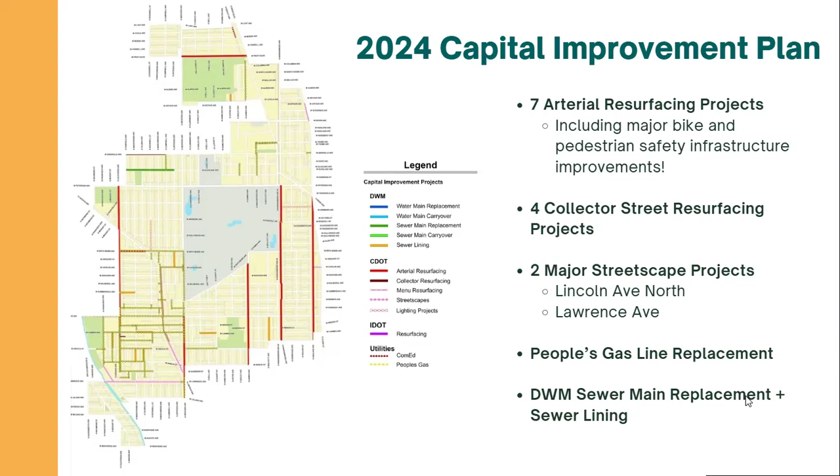We have this stuff on our website, you'll be able to check out details later. But if you could imagine, everything there that's a color represents a piece and part of the ward and the street that's being affected by one or more of those things. It's a lot, always. But what we're going to do is really break down streets right now, and we're going to have Murph take it from here.

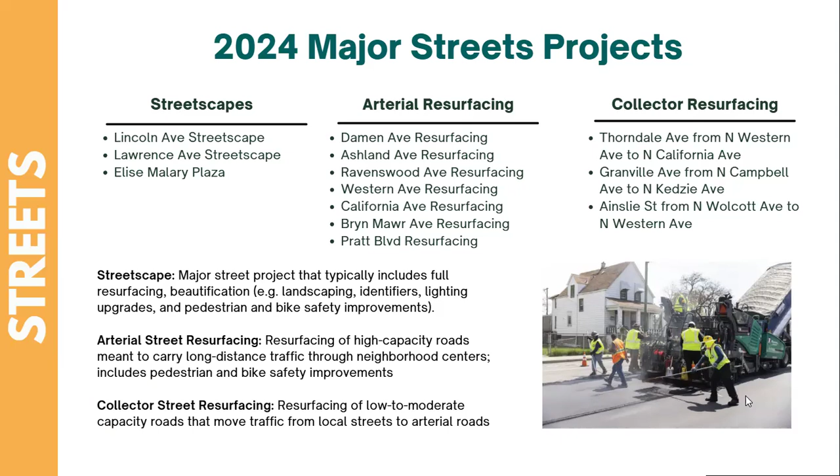And then one step down from that, we have collector street resurfacing, which are those lower volume roads, like Granville is a good example of one of those. Those typically are just resurfacing, but for a lot of our collector roads, we're also looking at pedestrian and bike safety infrastructure for those as well. So we are going to go through some of the major AR projects that are coming up this year.

You can see on this map here, anything in red is an arterial resurfacing project. A lot of parallel arterials happening. So one of the things we're trying to do as a ward is work with CDOT and make sure these are being scheduled so they're not having a really negative effect on the community. Construction is going to construction, it's going to be a pain, but we want to do things like make sure when we're doing Damen, we're not overlapping with schools letting out, things like that.

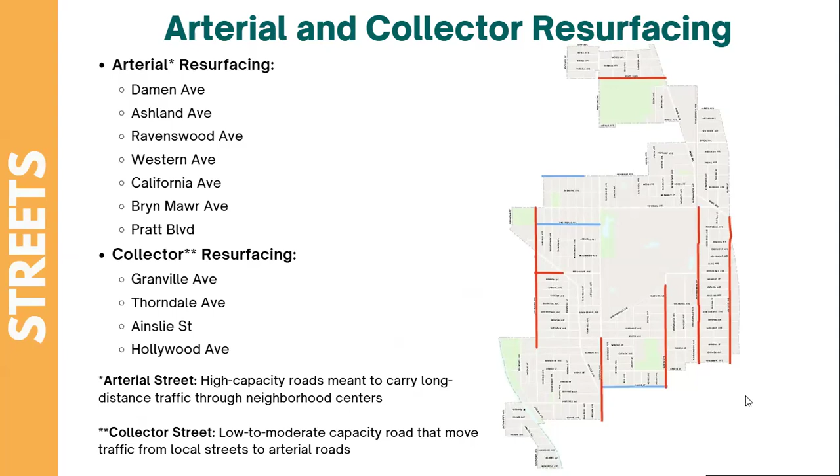And then anything in blue is going to be those collector street resurfacing projects. I'm certain you can't see the street names, but I'll tell you those ones over there on the left are Thorndale and Granville, which I know will be very welcome to anyone who is on those streets.

Okay, so we're going to kind of fly through these, but I wanted to give you a sense of some of the improvements coming as part of these projects. I am personally very proud of the Damen Avenue projects, in no small part because I live on Damen. In addition to the resurfacing, we have a couple of raised crosswalks coming as part of Damen Avenue. This is a really exciting thing. Both of those crosswalks are going to be on Winnemac and Winona, so right outside Amundsen High School and right outside Winnemac Park. For those of you unfamiliar with raised crosswalks, you can see what that looks like here.

It basically is raising the level of a crosswalk to the sidewalk level. So it does a couple of things. It improves visibility for cars seeing pedestrians because they're taller, and it also functions as a low-grade speed hump because you are raising the level of the street.

So we're going to have at least 2 of those on Damen Ave. We're also going to have a whole host of bump outs and curb extensions, which you can see in this picture. The function of a bump out or curb extension is to make a crosswalk shorter, so as a pedestrian you have less width of street to cross. It also usually has the impact of calming down left turns and calming traffic in general.

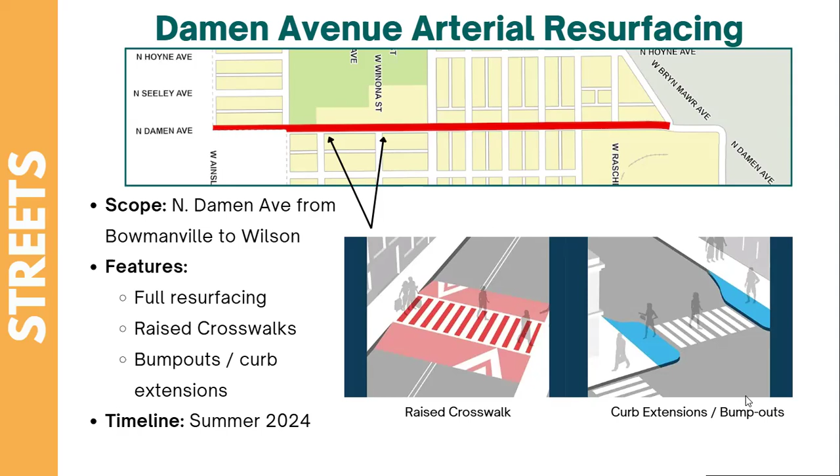The other thing we may have coming as part of Damen Avenue, but haven't confirmed yet, is a small stretch of protected bike lanes over near the cemetery on Bowmanville and Bryn Mawr. That's something we're hoping to squeeze in as part of this project. This should be happening in summer 2024. I haven't gotten a date yet, but I'm told it'll be starting in June, so if you live near Damen, get ready.

It's gonna be great. The next one that I think will be extremely good news to a lot of folks is Ashland Avenue. If you have ever been a pedestrian on Ashland Avenue, you know how necessary pedestrian safety improvements are on this block, and there are a whole lot of them coming. This is a huge resurfacing project that's going to encompass several different wards, possibly all the way down to Belmont, so it's a real big one.

In our ward, we're going to see a number of pedestrian islands coming at key intersections to make crossings shorter, and to add an island in the middle where traffic is really wild on Ashland. We have a new traffic signal coming to Ashland and Berwyn, which will help with a lot of things, one being that Elise Malary Plaza is coming to Catalpa, so we're seeing the necessity of having a traffic signal on Berwyn to calm and direct traffic at that intersection.

There are also going to be in-lane bus lanes, bump outs and curb extensions on a whole lot of the intersections up and down Ashland Avenue. There's so much coming that I can't put it all on this list, but we did a huge traffic study there last year and we're really excited to bring so many of these improvements as part of our Ashland resurfacing next year. This should be happening this year as well. I believe it's starting in the north, so it may come south to us a bit later in the summer or fall, but it should be starting this year.

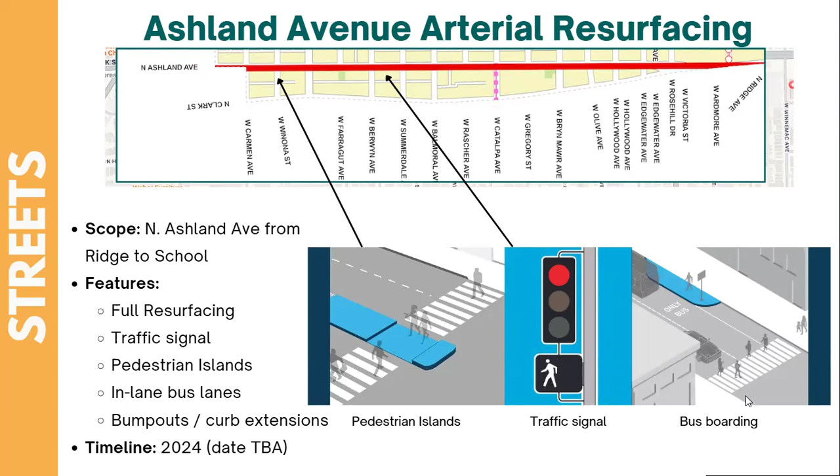Ravenswood, it's another exciting one. Ravenswood has a resurfacing project going on from Peterson to Eastwood. This is something we've partnered with the 47th Ward on, thinking about how Ravenswood can better serve the neighborhood, cyclists, pedestrians, and also cars, since it's a road people drive on. I say that, I don't drive, but I'm in the car sometimes.

In addition to the resurfacing, we have a bunch of bump outs and curb extensions coming to the 40th Ward stretch of Ravenswood. We have bike-friendly speed humps coming because there's going to be a neighborhood bike route all up and down Ravenswood. That shared bike lane, where it's two ways, is going to connect to the greenway that starts, I believe, where it becomes one way. So it's going to be a very cool project.

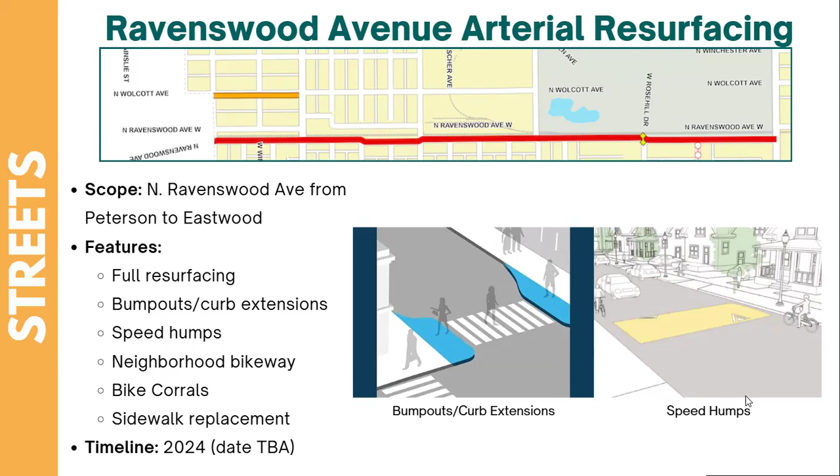In addition, there's some bike corrals coming and some sidewalk replacement happening, which we usually don't get in an AR project, so that's pretty exciting. That, again, is scheduled to happen in 2024. We will probably have a better idea of exactly what in the next few weeks.

Western Avenue. We had the north part of the 40th Ward stretch of Western Avenue happen last year, so if you live or work in that area, you may have seen some resurfacing going on. We're now moving south. Our stretch is going to be from Foster to Leland, and it's going to include resurfacing, bump outs and curb extensions, and pedestrian islands at major intersections.

Winnemac is one of those. Then once you get to the 47th Ward, it's going to turn into that Western Ave streetscape that's happening as part of the Brown Line station. So this is all part of our plan to make Western Avenue a more pleasant place to be — not just because our office...

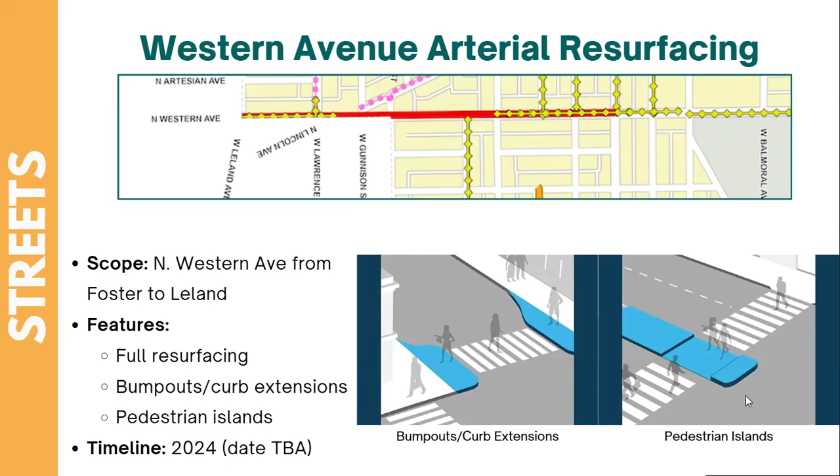Exactly, and here too. So next is California Avenue. This is going to be a resurfacing project from Peterson to Winona.

This is a little bit of a shorter list when it comes to pedestrian safety because California is a fairly narrow road, so some of those bigger things like pedestrian islands are harder to do. We are getting a lot of bump outs and curb extensions up and down California, so those will be coming this year.

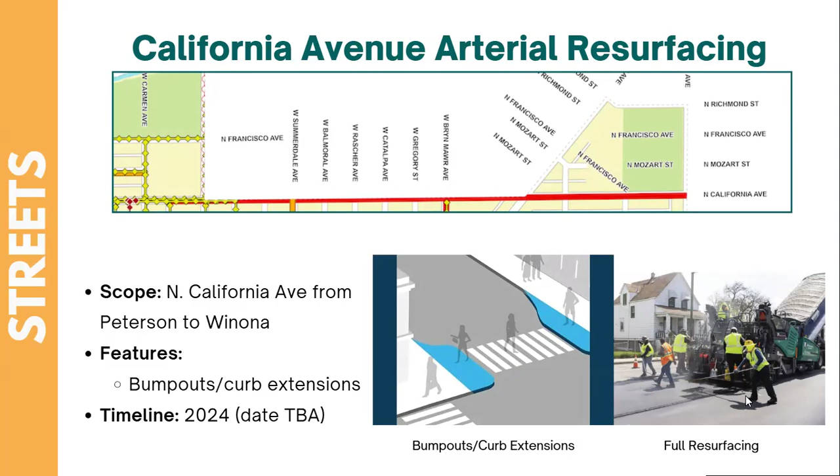There's a number of these. I believe California, Damon, Bryn Mawr, and maybe Pratt are federally funded, which means they have to happen this year, so that's always good news.

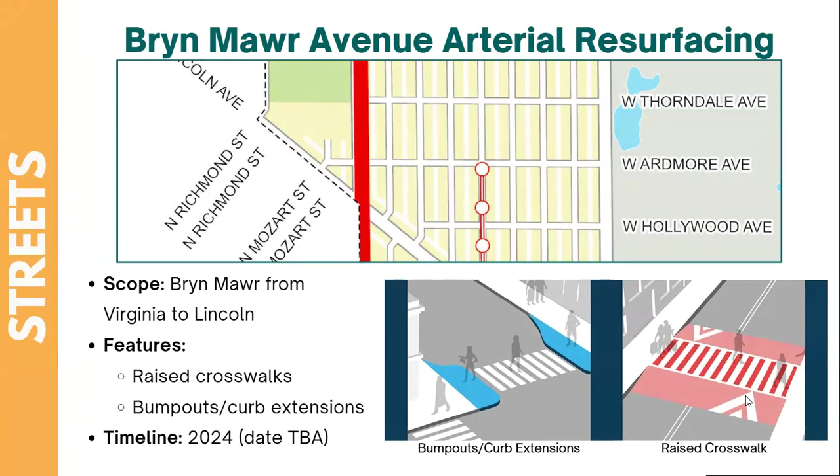Bryn Mawr, we only have a really tiny stretch of this. This is happening mostly west of our ward, but we are having Bryn Mawr from Virginia to Lincoln resurfaced. That's going to include some curb extensions and bump outs, and also possibly raised crosswalks along one or two of those intersections.

And then lastly, we have Pratt up in the north of the 40th ward. Again, this is part of a much larger project from Western to Sheridan. In the 40th ward, we have a smaller stretch adjacent to Warren Park, but this is going to include a bunch of really exciting things - probably the most exciting is going to include a stretch of protected bike lanes.

I'm going to turn this over to the other person in a moment who's going to take you through some of the bike things happening. But one of the things the city is really working to do is be strategic about where we're putting protected bike lanes and how we're connecting those with neighborhood greenways.

The Winnemac Greenway is probably one that some of you have seen, and that's the plan - to have these bigger, more robust protected bike lanes connected by low stress neighborhood routes. So we're having those on Pratt, we're also having those on Lincoln. Would you like to talk more about that?

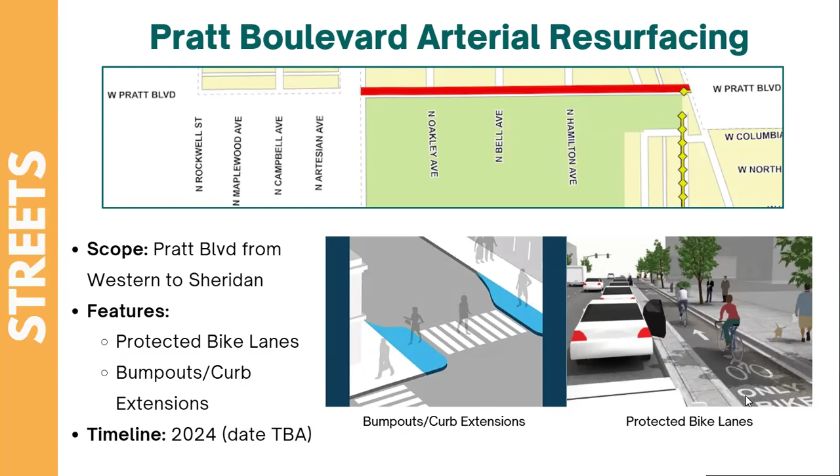Yeah. All right, so... mic check, here we go, thank you.

We also have Thorndale, Granville, and Ainslie that are getting resurfaced as well.

Let's talk streetscapes. Upon taking office in our first term, we really wanted to see how we can rejuvenate a lot of the 40th ward. Some of you know that when you think of Lincoln Square, you think of Lawrence South - you don't think of what's happening in Lawrence North. So when we were looking at streets that definitely could be improved, Lawrence was one.

I know you're feeling it, I'm with you. And Lincoln was one where we were able to get $16 million worth of TIF funds to really try to create what we call the Lincoln Avenue North Arts District, or LANA. It's definitely something where you plant the seeds and ultimately see the harvest - term over term, year over year, you're getting to see what those changes will become.

So the streetscape is broken into two sections. It says Ainslie to Catalpa, but for the record, Western to Catalpa is the stretch we're talking about - it's the Ainslie Arts Plaza, that whole stretch.

We will be having protected bike lanes coming into that whole section, actually from Western all the way to Berwyn, to then connect to the Berwyn Greenway - my apologies. We've got new sidewalk resurfacing, and we've also got these larger people spaces. This is the corner of Catalpa and Lincoln.

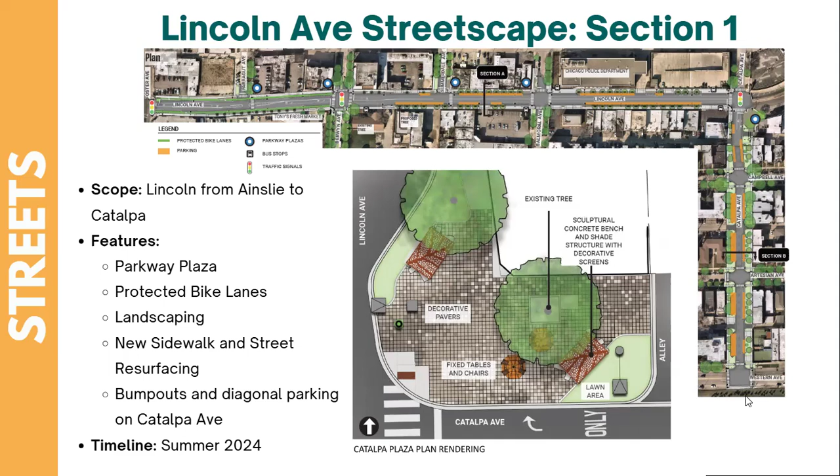So that's occurring there, the Ainslie Arts Plaza, I'll show a little bit more later. Then you've got the stretch from Foster to Catalpa, you've got some plaza there. And you've got just the one stretch from Foster to Berwyn that's protected bike lane when you're going Foster North.

And then again, as I mentioned, Catalpa's getting narrowed. As you can tell from the picture, a lot more pedestrian and bike safety.

What our goal is, once you get that going, you increase some of the density along Lincoln so you have more people to sustain the local businesses in the area. You end up having more thriving local storefronts. We've also created living workspaces.

Imagine if you're a first-time artist or photographer. You can't afford a storefront and an apartment because you're living in the real world. So the living workspace is a storefront and an apartment combined, so in effect you can do both in the same space. They end up being a little bit cheaper to rent, in a way that allows somebody to develop their first business. So we'll have those along that area as well.

When you got all that going, you get more traffic coming in, then we want to talk to CTA about getting a more frequent Lincoln Avenue bus going. Right now, we're just planting the seed. We're not there yet, but we're getting there. There's a larger goal in what we're doing.

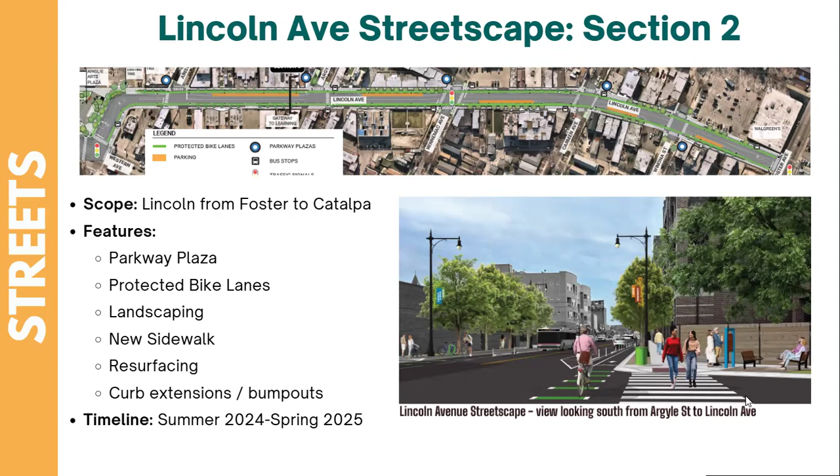Also adding artwork along the whole area. The Lawrence streetscape - how many of y'all are so glad that thing's almost over? Yeah, Lincoln's coming guys, but in the meantime it's great.

Lawrence, as you all know, was definitely like driving through the moon, except for those moments where your sewer covers were flying through because there was water pumping out. Do you guys remember that storm? No? Good, thanks, I'm glad you guys don't remember that.

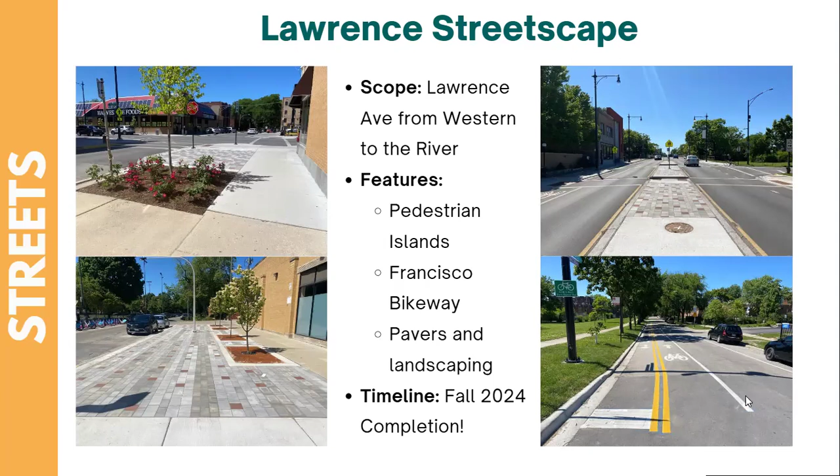You do, okay. So this is all largely completed. We've got, as you can tell, the pavers, spaces created, we got street lights coming in, we're gonna have the identifiers coming in shortly. So by end of, I'm gonna say fall - I like to give folks extra time - you should see this thing completed. Probably.

This is in Andersonville, a stretch of Catalpa between Clark and Ashland. Through COVID, we were able to create shared space and kind of block it off for a little bit so you can do farmers markets there. People wrapped their head around it in a way that allowed us to create a plaza.

And because it's a space that not only was for farmers markets, but really had a lot of community activism happening, we are naming it after our Black trans sister who is no longer with us, Elise Malary.

To see representation in the world, being able to have these kind of landmark opportunities, are something we want to make sure we move forward. So this should be getting started in 2025, hopefully completed in 2025.

Fingers crossed. Okay, next we're going to go into bike stuff. So a lot of our cycle family here have long been screaming for something they like to call bike grid now. So it is about creating the same kind of infrastructure for bikes that hasn't existed.

When you think about what we want to get to, it's a world where you have multimodal transportation. When you look at a city in the U.S., it's largely been driven through car culture and become very car-centric. It's why the streets are so wide, people race through them. Anxiety and road rage after COVID's gotten worse, makes it a lot harder for people to get on public transportation because that's not delivering the way it should.

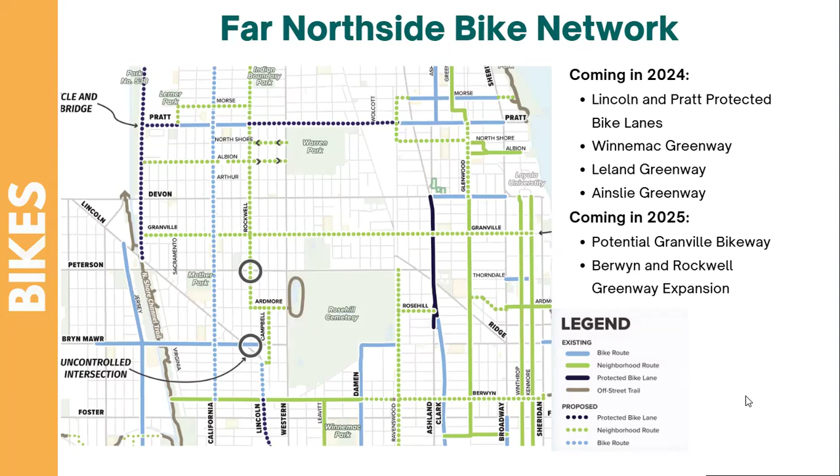And so in trying to figure out how to tie it all together, this is about trying to figure out what can be done in the short term, what can be done in the long term, taking into account what actual impediments there are, like Rosehill Cemetery - those are just realities - and figuring out what a network looks like. So wanted to kind of share that with you all as a larger goal. We're having conversations going forward.

So Lincoln Avenue has protected bike lanes, as I mentioned. As Murph had mentioned, Pratt is getting a protected bike lane over by Warren Park.

Then we know about the Leland Greenway, right? Y'all have been at 47th Ward, been leading a lot on that. We partnered up because we do have a stretch of Leland as well. So we've got curb extensions, pavement markings, speed humps as well to make that more bike friendly. We also have a bikeway, so from Rockwell to Lincoln would be largely one-way or counterflow.

And then Western to Damon being two-way, right? And then Winnemac Greenway also, that was actually up. That surprised us, but it actually got there super quick. So the city actually paid for it. Oh, it was also our idea. It was also our idea. Sorry, I didn't think of it.

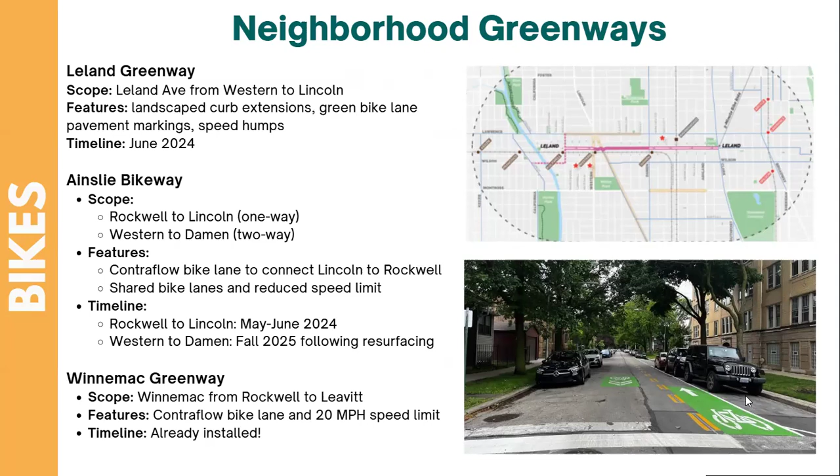Here's what's not our idea: painting over potholes and calling it a greenway. So the city will paint those, and then when it can resurface, it does so. It doesn't pause to resurface and then paint. Kind of backwards, we know. We've been trying to have conversations to get that rectified, but sometimes the city does what the city does.

So next we go to Metra. You guys know we got a new Metra station in the 40th, right? Sweet. June 11th, Tuesday, 10 a.m., we're going to have the dedication for this over Peterson Ridge, where the station is, of course. It's also 40 years for Metra that they'll be celebrating, so come on through.

You want to call the shout outs? Okay, we have to do the shout outs. Oh, yes. Shout out to our native plant committee, because we also want to make sure.

We want to make sure the community was at the forefront, and when they are making these landscape improvements, that they are taking into account what the neighbors want to see, and utilizing native species in a way that makes sense and is sustainable in the long term. And shout out to our pollinator posses as well. So Scott Fink, Brett Jelinek, Trisha Van Eck, and Jean Smiling Coyote, who push us to always do better, and we are grateful for it.

Okay, so yeah, we're also working on making that a lot more pedestrian friendly when you look at the intersection, knowing that a lot of folks are going to be using it more. We're going to be talking to CTA about Peterson as well, right? Because now that you've got Peterson Ridge Metra Station, let's look at CTA and figure out those routes in a way that actually is more conducive for people traveling.

All right, and now I want to pull up our Director of Neighbor Services and Park Aficionado, Deirdre O'Connor. Oh, sorry, and we have to put some respect on our name. Also the 20th District Councilor, so a public safety elected official. Give it up for Deirdre.

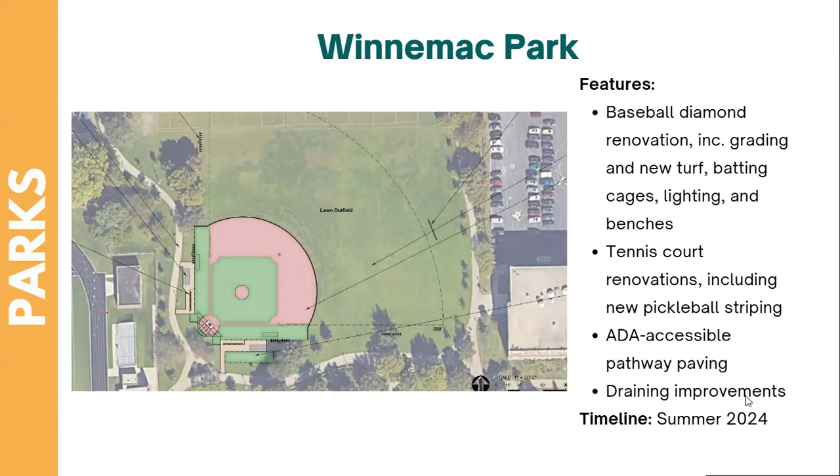So my favorite part about this role is I get to oversee park events. Okay, so there are a lot of park events. First off, we have Winnemac. Right now, the slated construction for the baseball diamond is coming, and that is going to be starting soon. Then they're also doing tennis court renovations, including some pickleball striping, ADA accessible pathways, and some drainage improvements to the field. So we're super excited to see that come.

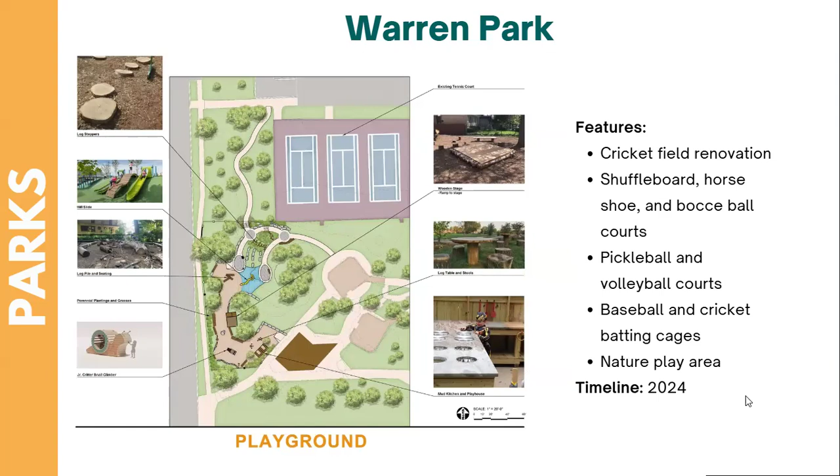Warren Park -- so we have a lot of improvements coming to Warren Park. The cricket field is getting a complete renovation, including lighting. Shuffleboard, horseshoe, and bocce ball courts are all being redone and made ADA accessible. Pickleball and volleyball courts are being done. Baseball and cricket batting cages are being replaced. And then a lovely nature play area is coming that was designed a lot by the children themselves. They had children imagine how they wanted the park to look, and then they built around the kids' ideas, which I thought was a really great thing that the park did. That is supposed to be starting in summer, early fall, is what we're being told.

Park 599, soon to be renamed West Edgewater Green Park, is in its final stages, we hope. They have been planting trees and it's moving along, so it should be done by the end of June. Stay tuned, because we're going to have a wonderful ribbon cutting celebration for the park. Sign up for the newsletter.

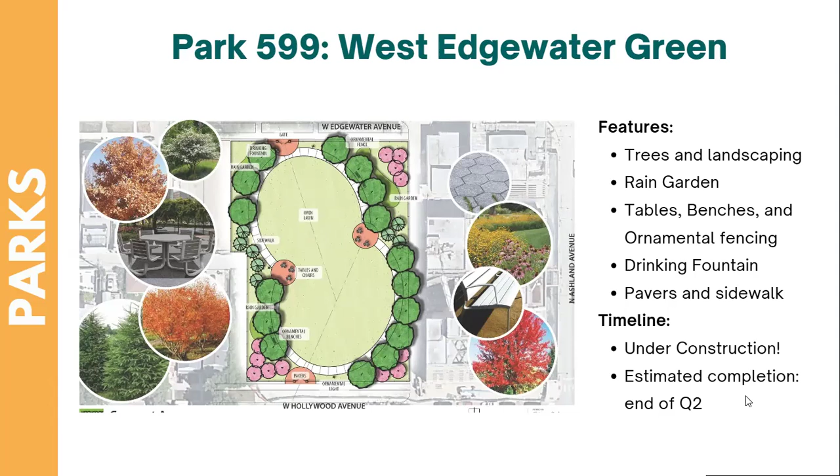Some other park improvements: if anyone's been over to Emmerson Park recently, we installed an excellent exercise setup. There's a great video of Andre working out in the early mornings. You can catch him there shooting hoops or using the exercise equipment.

Some other things happening right now: they're doing tennis court renovations. That's currently happening and should be done soon.

Green Briar - disregard that new workout equipment, that's not happening at Green Briar. Sorry, that's a good PB project idea if anyone wants it at Green Briar. So they are getting tennis court and basketball court renovations, and that construction has currently started. If you have a question, you can write it on an index card and we'll answer it for Q&A.

West Ridge was one of our winners with our PB project last year, and so they are getting some new storage and an art installation for them. That's all in the design planning stages, and we hope to see construction begin in 2025.

Not mentioned here is Mather Park. I just met with Mather Park this week, and we're in talks with the principal at Mather Park and the Chicago Park District on doing a lot of improvements to the park there. If anyone's been to the park, it's a little run down and needs a lot of love. So it's my personal pet project - stay tuned for Mather Park improvements.

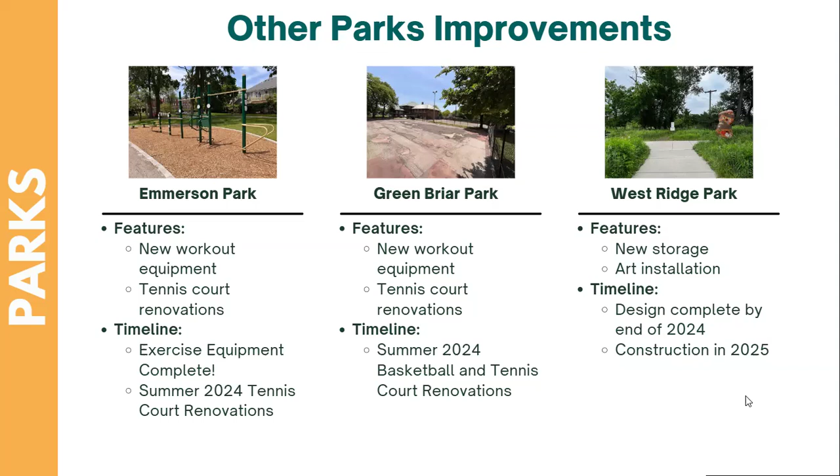We've got Haven on Lincoln - those of you may know it used to be the Diplomat Motel. We took some city funds, part ARPA, part TIF, to acquire the property and convert it into a non-congregate shelter. What does that mean? It means a shelter where each person has the dignity of their own unit, and it also has support services on site. So when somebody's trying to take you through the journey of being homeless and finding permanent housing, that is where one would find that kind of opportunity. This would be the first of its kind in the city.

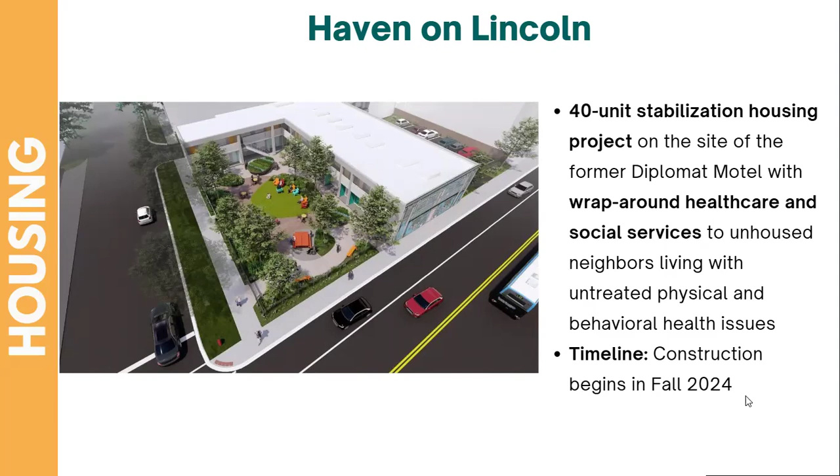We're also working on making it a community center, so if you're in the 40th ward, let's say, we've got unhoused neighbors, being able to utilize that as an opportunity, as a referral process, as well as an ER like a Swedish. If it does well, and I believe it will - we're invested in it doing so - I can see these multiplying across the wards, to really provide that kind of support and system that we know people deserve.

Now we've got some developments from the past year. 5035 Lincoln - how many of you know that old pile of bricks with murals on it? So it took a lot of time, but we're having the two adjacent properties developed. The one that already has the bones to it is being built currently, and being added to it is a 5-story mixed-use building with 47 units, 9 of which will be affordable. Also looking at having either a cafe or one of those live workspaces I mentioned prior.

Then Lawrence Gateway - that's just west of the river, on the south side of Lawrence, maybe a block west. We approved a 5-story mixed-use building there, 40 units, 8 affordable. That thing is gorgeous, so that's coming as well. We might have a tenant coming in on the retail side - I won't steal any thunder, but that's announced, and we'll be happy to let you guys know. It's good to know you already have a tenant coming in when this thing is built.

What is the address on that one? 2919 Lincoln? It's something, 29 something. We'll have it on the website - go to the website, go team.

And then 5400 North Ashland - that one's at Balmoral and Ashland. There was a proposal for 18 units. Hearing back from the neighbors about concerns about the aesthetics on it, some of the density brought it down a floor. So we're looking at 15 units, 3 affordable, and that's coming as well.

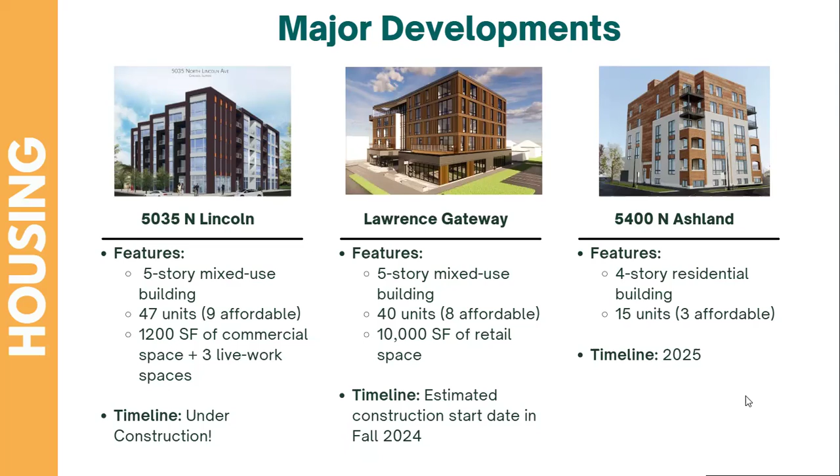All of these are also apartments - they're apartments instead of condos. We know that there needs to be more rental space, more affordability, especially in the 40th ward. So that is part of our goal and values moving forward.

Also, we're adding artwork and murals in different places, including 4827 North Lincoln. If you were on the Ainslie Arts Plaza and look north on Lincoln, there's a huge building with a funeral service sign. That's going to be a whole mural, that whole thing. We got grant funding from the Department of Cultural Affairs and Special Events to get that going, in partnership with the Lincoln Square Ravenswood Chamber.

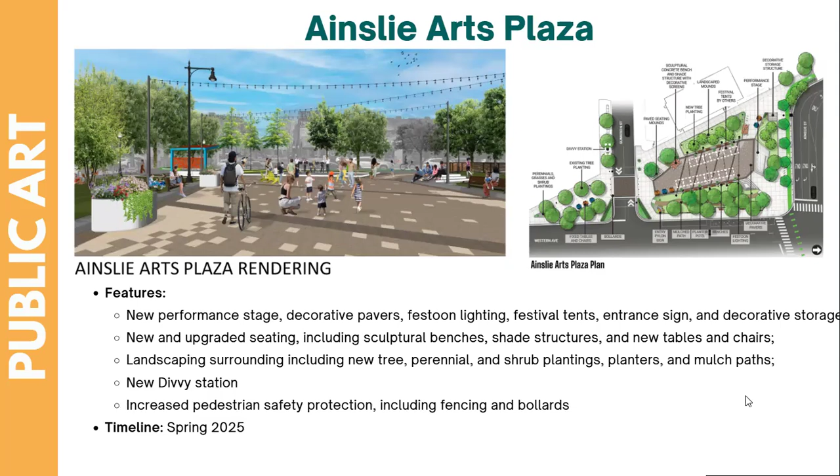It does say spring 2025 for the whole thing, but I believe our streetscape should be starting now. It's starting in June, but completion could take a bit.

All right, this is another one of our babies, the Western Ave rezone. In trying to create more affordability, you either try to mandate 20% if you have a property that's 10 units or more, or you can try to take it on in more of a bulk fashion. So what we've done here is throughout the 40th ward, from Leland all the way to Lunt, we're upzoning a lot of the properties so that you can create more density, have more residential on top of the mixed use.

What the zoning also does is it makes it harder to have auto body shops and dealerships, so that way you can...

I was waiting for that part, but I knew there was some clause for that.

That allows you to really reimagine what kind of businesses you have along Western and have enough density above it to support them. I'll just say this, which is what I tell a lot of neighbors: if you're not gonna have height on a street like Western, I don't know what street you're gonna be able to do it on. Looking at the kind of thoroughfare it is, it really lends itself to this conversation.

This is actually the first time it'll be happening in the city of Chicago to have this kind of proactive plan zoning of an area, but we also know the 47th ward is doing it. We believe the 50th ward will soon follow suit, and want to give credit to Alderwoman Debra Silverstein, who led the vision to have the Western Ave corridor study, which has led to the takeaways that have also led to this now. You can check more out at 40thward.org/Westernrezone.

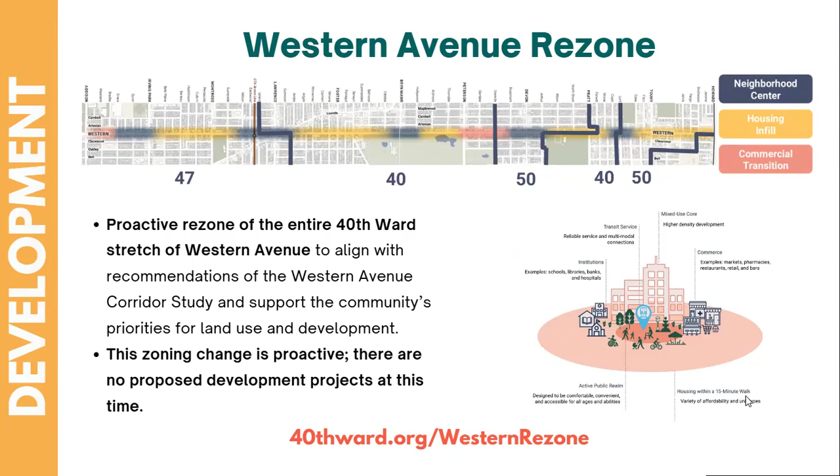So we've gone through a lot up to this point. There's a quiz now - do you guys remember anything that happened in the last 20 slides? No? Okay, this is why you should tune into the 40th Ward website. So I will have Murph walk you through that.

How's everybody doing?

As of this morning, we have a new construction website where you can see details on all of these projects. Everything we've told you here, with the exception of the AR projects, because we're waiting for final designs on those, you can now find at 40thward.org/projects. You'll be able to go and search projects by type.

So if you want to know about bike infrastructure coming to the ward, housing, pedestrian safety, any of that, you can search by type, zip code, or status. If you want to know what's coming up or what's been completed, you can search by all those things and click into any project to see all the details.

We also have construction updates on those pages. For most of our major projects, we ask that contractors send us weekly updates, and those automatically update to the website. So if you get busy and don't read the newsletter, you can always go to 40thward.org/projects to see the latest update. The other thing you can do is subscribe for updates to a particular project.

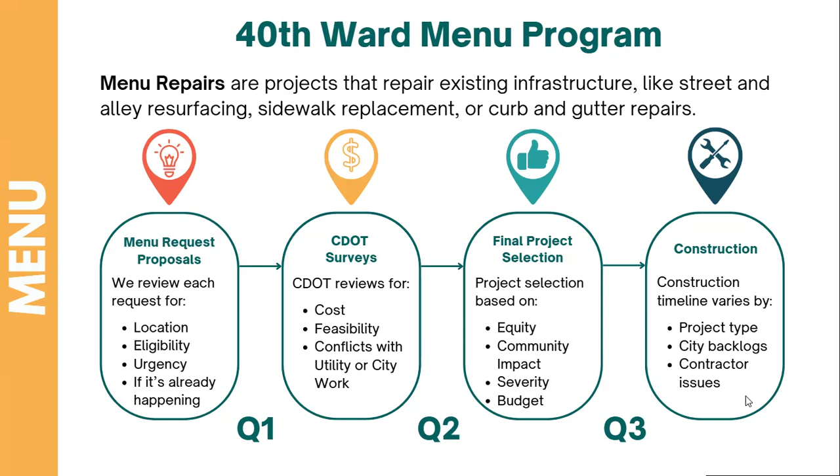Generally, the hope is that if you authorize something by April or May, it will get done that year. In the past few years there have been concrete issues and labor issues, so they're a bit behind on concrete projects, but I've been told they anticipate they'll catch up this year. So if you've been waiting on an alley reconstruction, this may be your year. I'll talk to them afterwards.

So here's how you submit menu repairs. We're going to ask you for a bunch of information about what kind of menu repair you're looking for, and to tell us where it is. Depending on what you're asking for, we might ask for something a little different. So if it's a sidewalk repair, we might ask for an address. If it's an alley, we want to know what four streets bound that alley.

We're going to ask you for pictures a lot of the time. For things like resurfacing of streets, this is less important. For things like alley repairs and sidewalk repairs, it's really helpful because it helps us determine how severe and urgent an issue it is. If you have anything that keeps you from taking pictures, that's okay, just let us know and we'll send a staff member out. But if you can include a picture, it really helps us out.

And then, lastly, we're going to ask you to make sure it's the 40th ward, because we did a redistricting recently, and sometimes we get things for the 47th ward. Those we send to Joshua at the 47th.

So you can submit your repair request anytime at bit.ly/40FIXIT. This is case sensitive, so it's in all caps. You can also find this information on our website at 40thward.org/development, and you can find a link to that form there.

So how do we make menu repair decisions? This is something we obviously are not going to put up to a vote, because A, that would take a really long time, and B, repairs are something we want to make sure are an equitable process that we're really thinking through from a big picture, not just about how many people can come out to vote for something. So here are some of the things we look at when deciding between projects.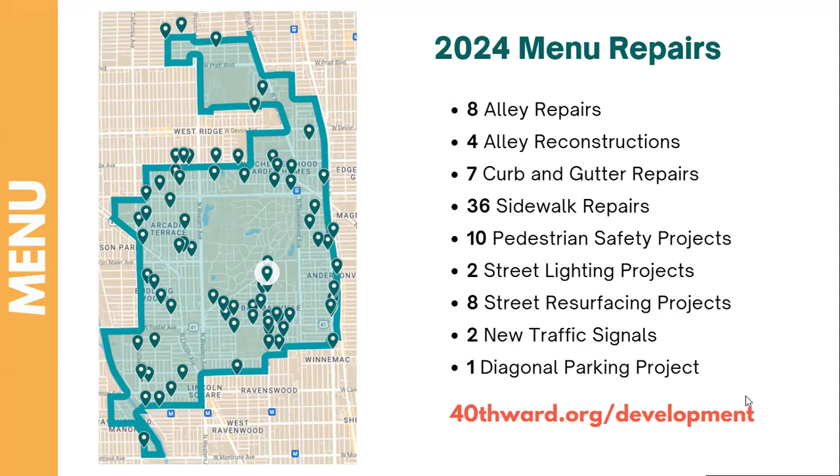On our website at 40thward.org/development, you can see this map and click on any of these markers to see information about that project. If we have information on when it's happening, that will be in those markers. It will also have a status - if it says authorized, that means we paid for it but it's not scheduled yet. If it says in progress, that means it's been scheduled and probably going to start in the next 2 weeks. If it's completed, it's done.

So that's menu. People's budget is a totally different thing, totally different process, even though it's the same money. We accept proposals for projects for the people's budget usually through the summer to the fall. So we have just opened up proposals for this year's new round of PB.

The way this process looks is we have the submission period that usually kicks off in Q2 of the year, where anyone can submit a project idea. These should be new projects - anytime you have a repair request, you can submit it to the repair form, but these are for new projects you're excited about. Maybe it's a new bike lane somewhere that doesn't have one, or a parks installation you want to see. And obviously it still has to be on city-owned property, and still has to be permanent infrastructure that will last at least 5 years.

Next, in Q3 around August or September of every year, we have our People's Budget Committee that goes through all these proposals and reviews them based on a number of criteria. They're the ones that pare those proposals down to a final ballot. So we have our semi-finalists, the staff will reach out to city departments, get estimates, make sure it's feasible, and then we pare that down to a final ballot that goes to all of you to vote on. That vote usually happens in November and December of every year, and the results are announced in January of the following year.

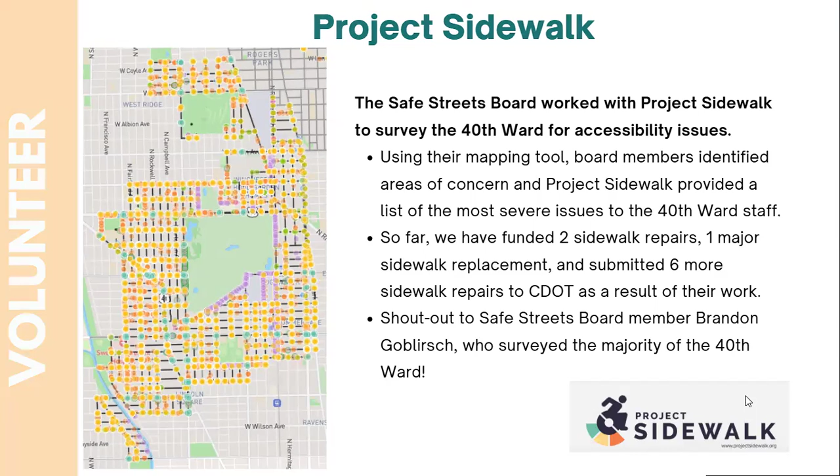And then Peterson Avenue safety planning. I've got a question for you folks. What happens when you take a Metra station and put it on top of one of the highest crash area intersections, and also put it on top of an area where you're trying to connect a whole bunch of bike lanes together? I don't know either, but that's what we're trying to figure out.

This is a really tricky problem, because we do have this sort of bottleneck created by the cemetery by Rosehill. You've got the train station, a lot of excitement, a lot of traffic. So we have been working for months now, iterating with the board on proposals that are in the city design. Thank you, Allison, for the transparency on this. We've got a lot of transparency.

Huge shout out to Odie, to Jessica, and Brandon again for heavy engagement here. A lot of the things that the board is going to the city about are questions, issues, concerns that we've been bringing up on the committee. So there's a lot of really good dialogue happening. If you are passionate, as many of us are, about safely navigating our neighborhood, not in a car, come hang out, come join. We're doing a lot of cool stuff.